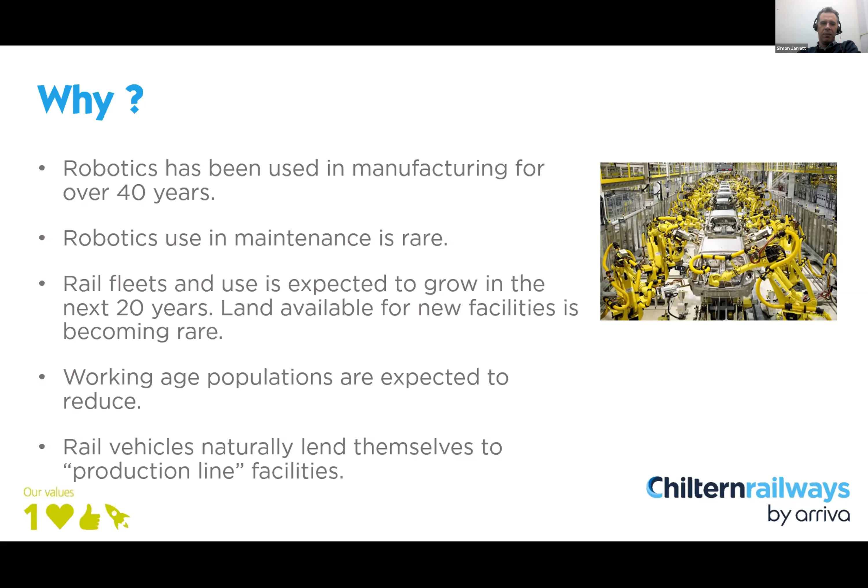But actually rail vehicles, when you look at them, lend themselves to kind of production line type facilities. So you can see on my illustration from a car manufacturing facility, that actually those cars are moving along on rails. So robots do actually hold for us, particularly in vehicle maintenance, quite attractive possibilities, and we're maybe actually quite well suited to it as an industry.

So where are their applications? There's stuff that is dull, stuff that gets us dirty, stuff that's quite difficult to do and maybe dangerous. For example, work on high voltage equipment, working in fairly hazardous chemicals, and stuff that we do very frequently.

If we do stuff frequently and we can get a robot to do it, that's probably got the best business case. So, for example, I work for Chiltern Railways. We fuel our trains every 2 to 3 days. It's a sort of task that would lend itself to being used to a robot doing.

Cleaning, we clean our trains every night, inside and outside. We top up fluids, we replace brake blocks and brake pads every night. And then on the electric trains, we replace shoe gear and pantographs.

I don't envy people who have to get up on pantographs to replace the carbons. Whilst we create and set up, we spend a lot of time setting up safe systems of work. There's surely a place or a position for robots to do that better for us.

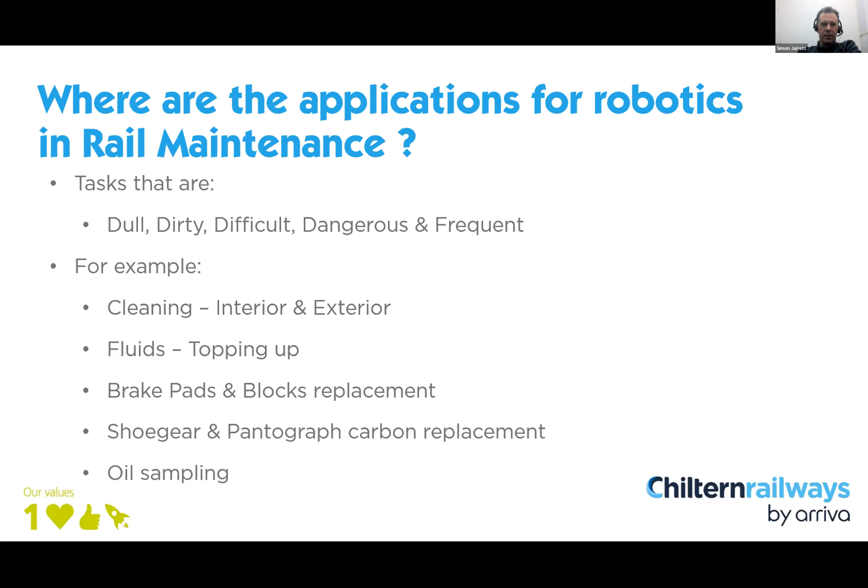So over the past few years, there have been a number of academic studies and work sponsored in the first place by RSSB, and there was some work by the University of Birmingham, Brunel University, who did a lot of work with me on application of robots to fluids, and Cranfield initially did quite a bit of work on how to clean train fronts. Some of that has been taken forward and is being developed into industrial products, particularly with a company called GBR Rail. But we are, as an industry, struggling to create the business environment that takes us from academic studies into real life applications of robots in the workplace and on our railway.

But tonight, we're going to hear from Cranfield. Professor Andrew Starr is going to talk to us about the work he's been doing with Network Rail on the approach to using robots on infrastructure maintenance.

And then Professor Gareth Tucker is going to talk to us about the work that Huddersfield are doing in their robotics laboratory on rail vehicle maintenance. There is a third research group in the country at Strathclyde University in Glasgow, who are also doing quite a bit of work on robotics in rolling stock. So we as an industry have gathered a bit of a research base in this, and we now need to try and develop the ideas and take them forward to actual railway trials.

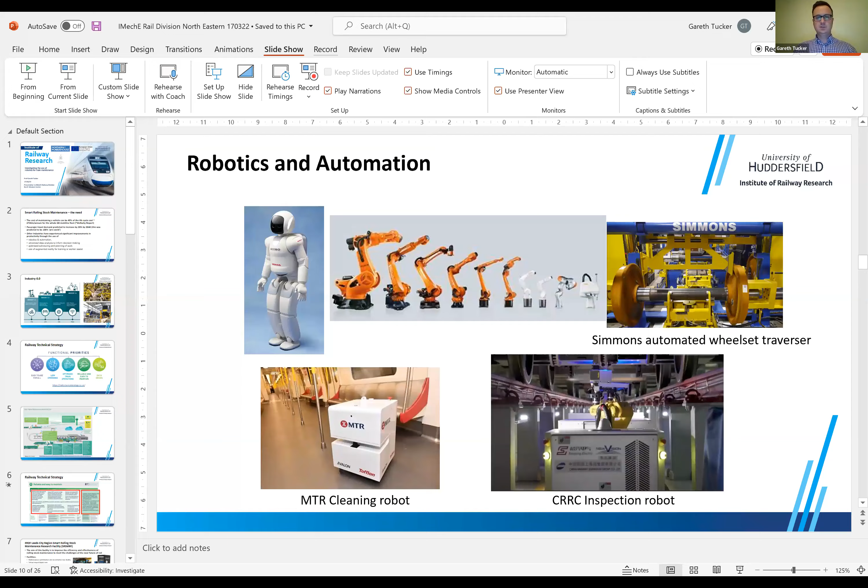So I'm Gareth Tucker, I work at the Institute of Railway Research in the University of Huddersfield. I'm going to tell you a bit about our work on the use of robotics for train maintenance. This is part of its long title, Smart Rolling Stock Maintenance Research Facility, which is an ERDF funded project.

So this is just a bit of background. We spend a lot of money in this country maintaining trains every year. The cost of maintaining the whole GB passenger fleet is nearly £730 million a year. So anything we can do to save a small percentage of that is going to add up to be big numbers.

It costs more to maintain a train through its life than it does to buy it in the first place. The whole life cycle cost obviously varies by fleet type, but on average 40% of the life cycle cost of a train is on maintaining it during its life. And it's a long asset life.

We think, as Simon alluded to, that the passenger fleet is going to keep growing. Obviously COVID made a big impact on passenger travel. There's still predictions that things are going to rise, maybe more slowly than they would have before COVID, with predictions saying 20% over the next 20 years. Obviously, if petrol and diesel keep going up like they are, then it is going to drive more people back to public transport, and it might go back to our previous imagination of what the growth might be.

In Simon's introduction, he also alluded to other industries using a lot of what we call smart technologies, which includes robotics and other things, data analysis to inform decision making, optimize scheduling and planning, and augmented reality. I'll mention them a little bit, as well as the robotics.

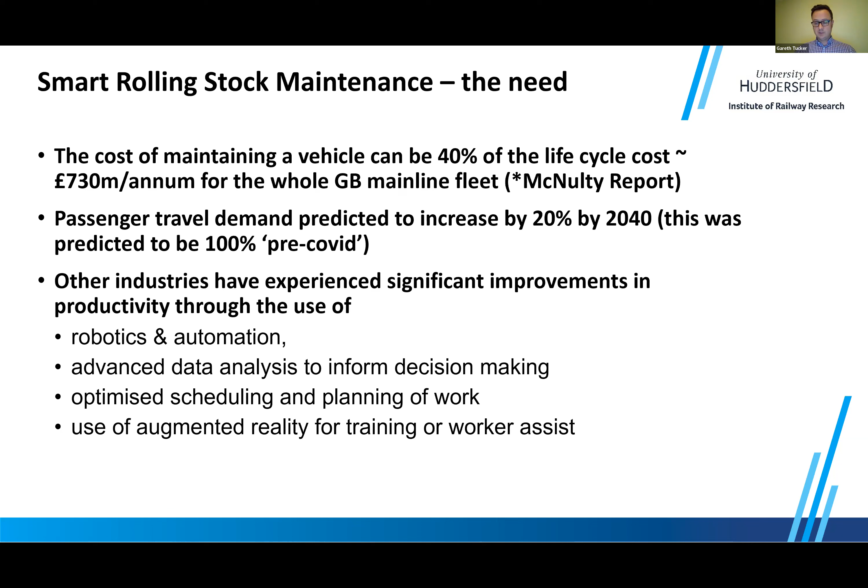A lot of you might be familiar with this concept of Industry 4.0, which is getting a bit of a buzzword recently. It's mainly focusing on manufacturing, but the idea is we're trying to take those concepts and apply them into a rail maintenance environment.

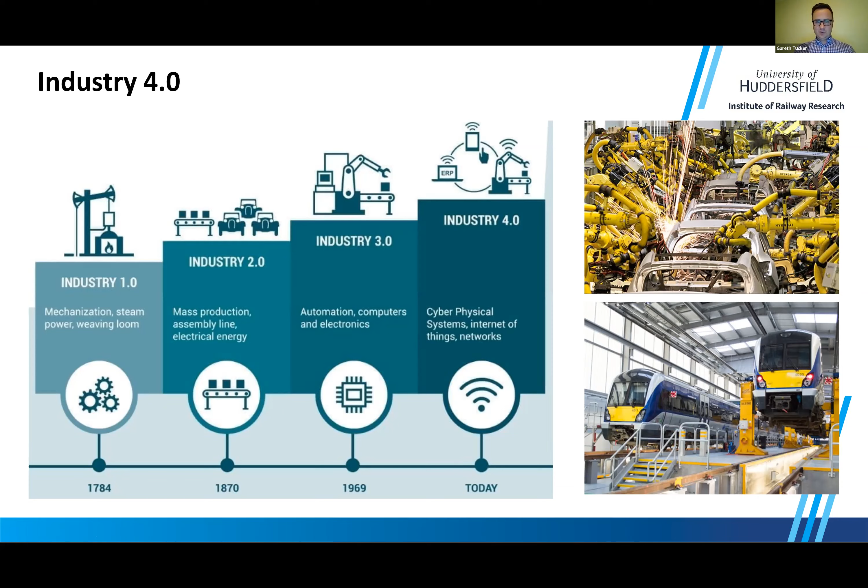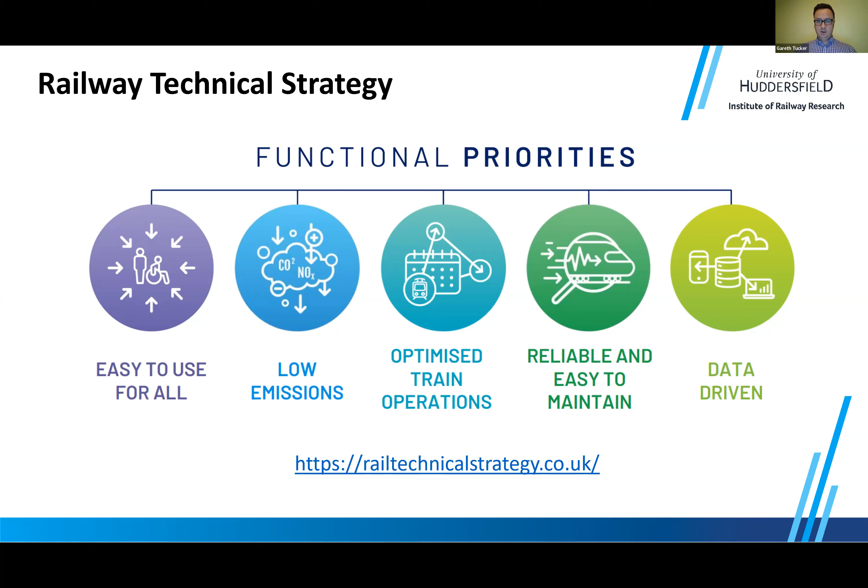And if we really do want to do that, obviously we've got to spend a lot of research and development time in order to do the implementation. Obviously in the real world, if it doesn't happen in 3 years' time, it happens in 5 years, it happens in 10 years, that's great too. But this is just showing there is some industry level aspiration to do something with robotics, either for trains or track or whatever we think.

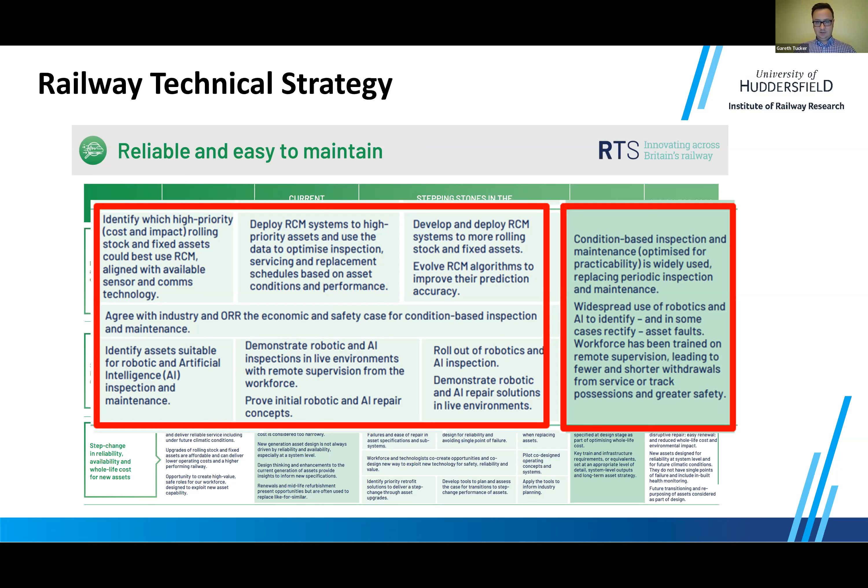So they'll be connected back to some sort of center, a data center that's going to do a lot of analysis, know all the movements of all the trains, know how far each train has gone every day, where every train is across the network, plan maintenance in the most efficient, optimal way.

And inside the depot, you'll have robots doing some of the work, not all the work. You'll have a digitally enabled workforce, so every staff member will, on a mobile phone, have a little app that's telling them the work they're going to do that day. That can link in with what the robot's doing. They can put in their results of their own manual or visual inspections. Also, an idea - maybe some stuff can happen during traffic hours when the train's in service, potentially.

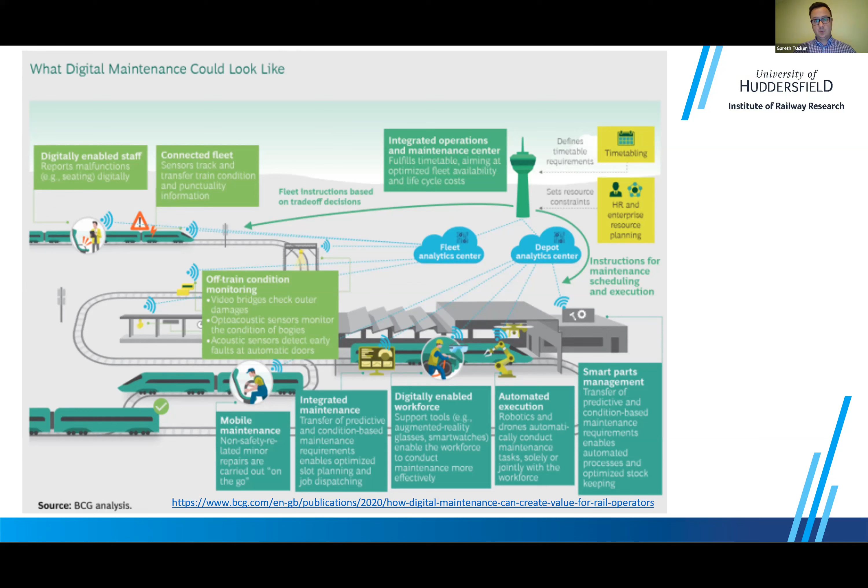So it's not just about robotics. I'm talking about the robotics element today. We've also got what we're calling the virtual depot, which is not a 3D model of a depot, it's a workflow model which we use for work optimization and planning, and RCM data processing and development, which we're using for the main element, that is trying to make better use of existing data that's already collected from trains to actually directly inform the maintenance.

And the augmented reality, which we think is a way of helping to either train staff or use as an aid during repetitive tasks so people don't forget things. And as an aspiration, at some point, maybe we're going to try and integrate that as a way of controlling the robots and calling programs on the robots. That's down the line. So this is a research project, we're just starting out, we're trying to see what's possible.

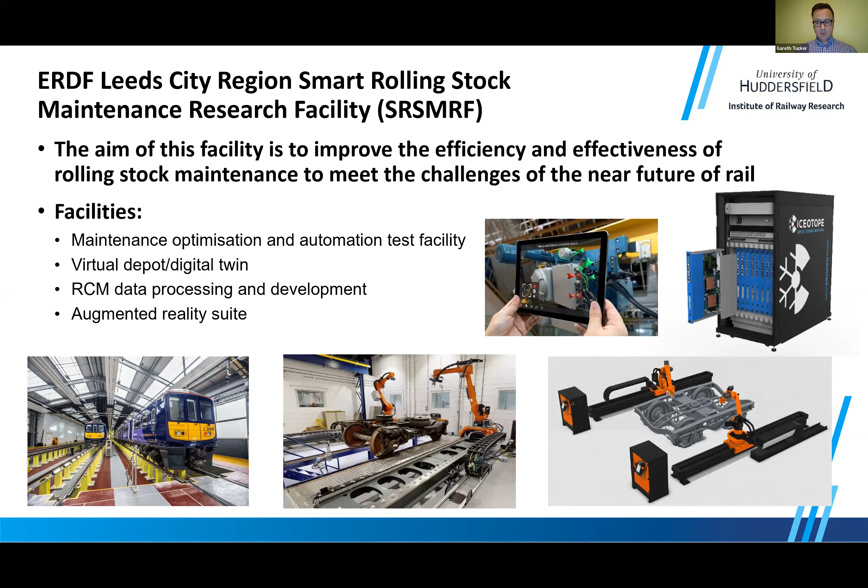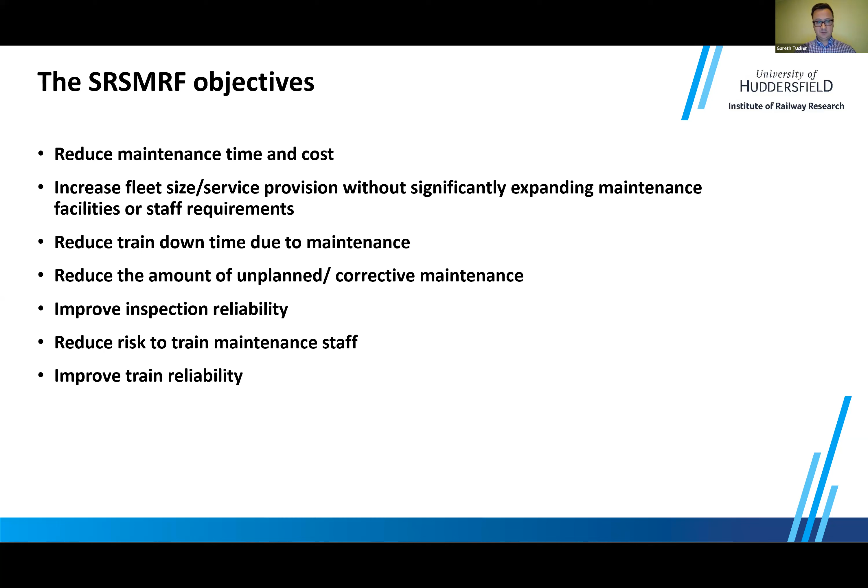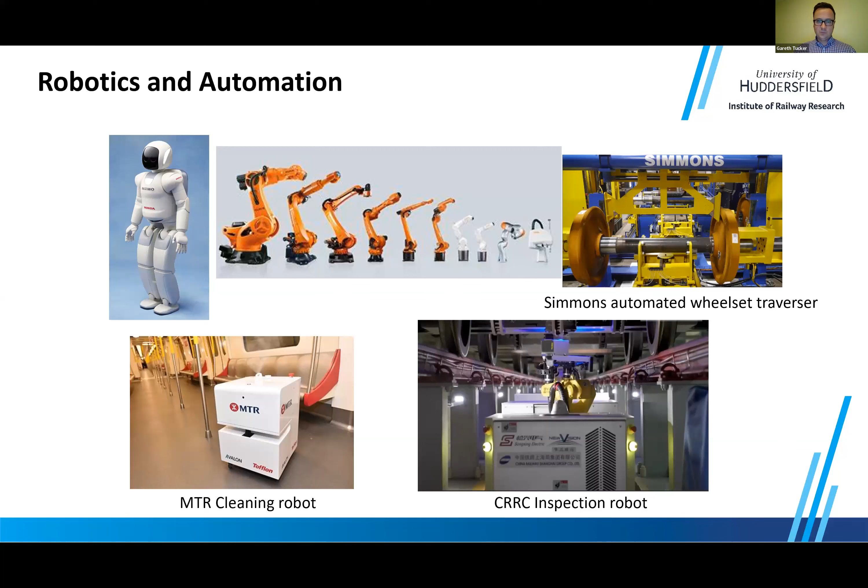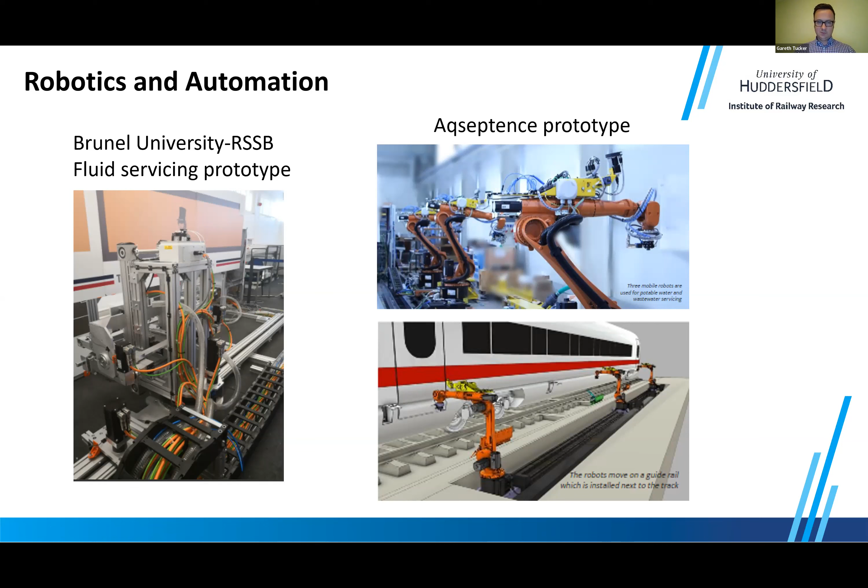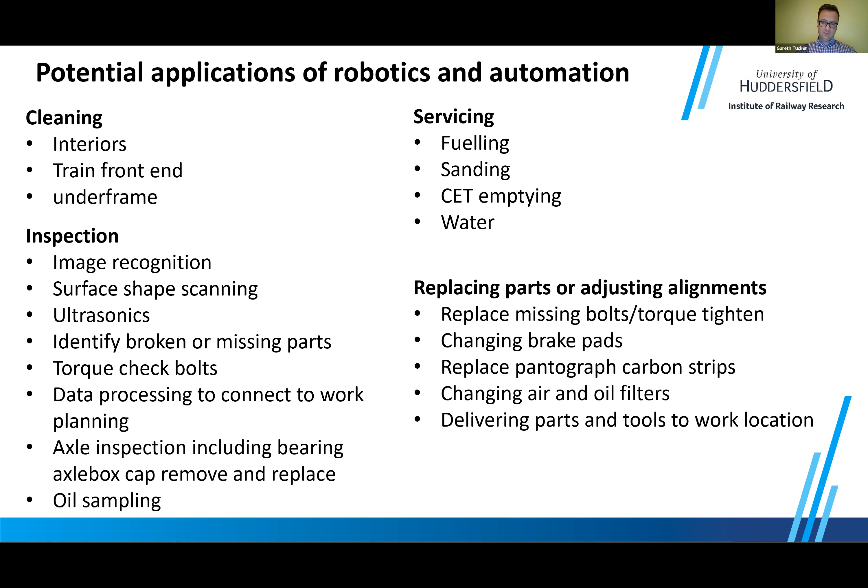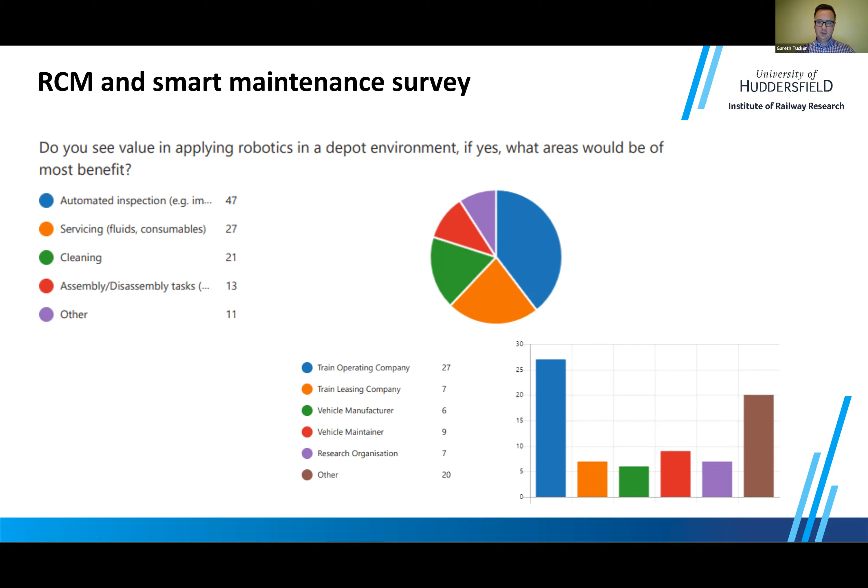Obviously when we go away and prove what's possible, we'll see if that still remains the same. So it's not straightforward trying to put robotics into a train depot.

These are the sorts of challenges I think we need to start addressing. Obviously in a manufacturing production line, everything is brand new, everything is moving through, it's exactly the same place every time. Each robot is doing a specific task, and everything is exactly where it should be every time it gets to its station. In a train depot, you've got a train coming in.

It's got a target point of where it's going to stop, but there's some tolerance within that, and any robotic system needs to be able to adjust for the exact stopping position of the train. Any components that have worn out, obviously the height of a train changes over time as the wheels wear, and the robots need to be able to adjust for that.

Robots also probably going to have to do multiple tasks rather than just one single repetitive task. There's also challenges around how we introduce industrial robots, since they need to be segregated from people. We need to work out how we might do that. And the business case obviously is a big challenge.

We need to be able to demonstrate there is a solid business case if people are going to go away and spend money up front on a lot of robotics equipment.

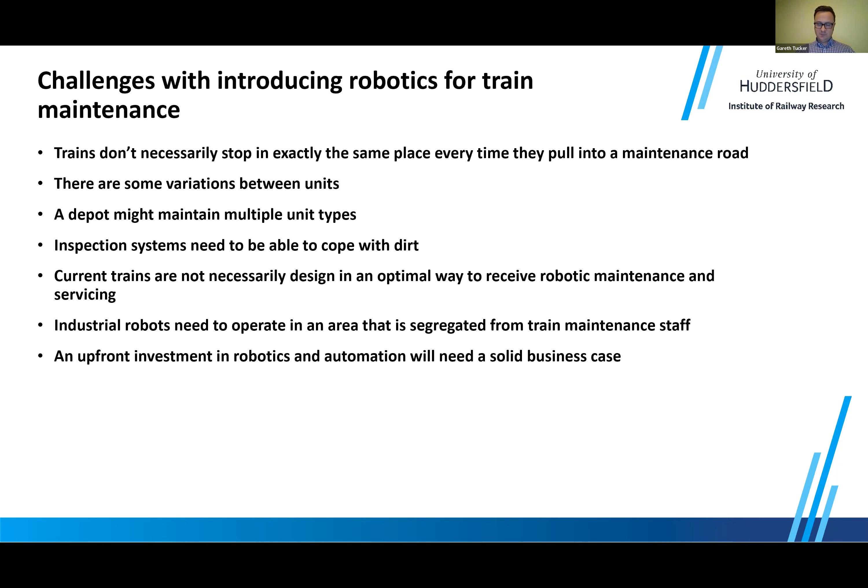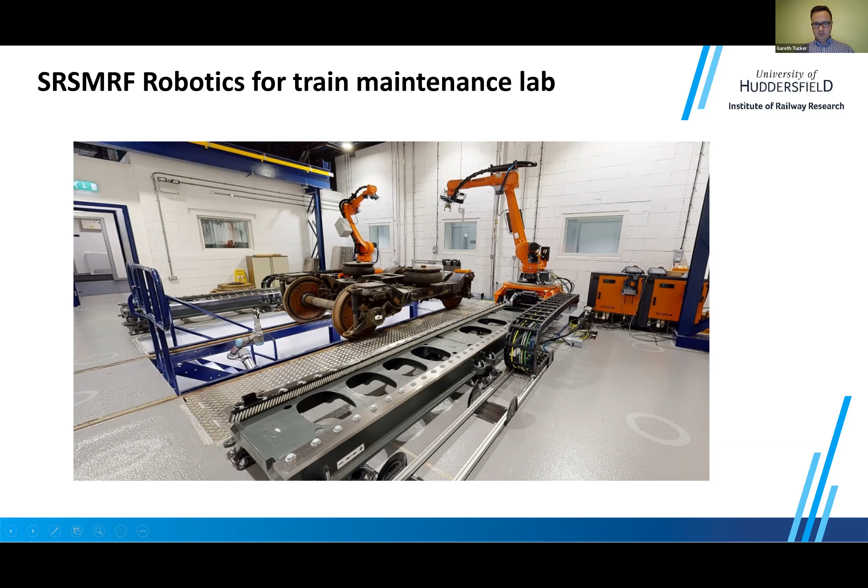Just another view of the same lab, showing in the pit with that UR robot I mentioned on its own little track.

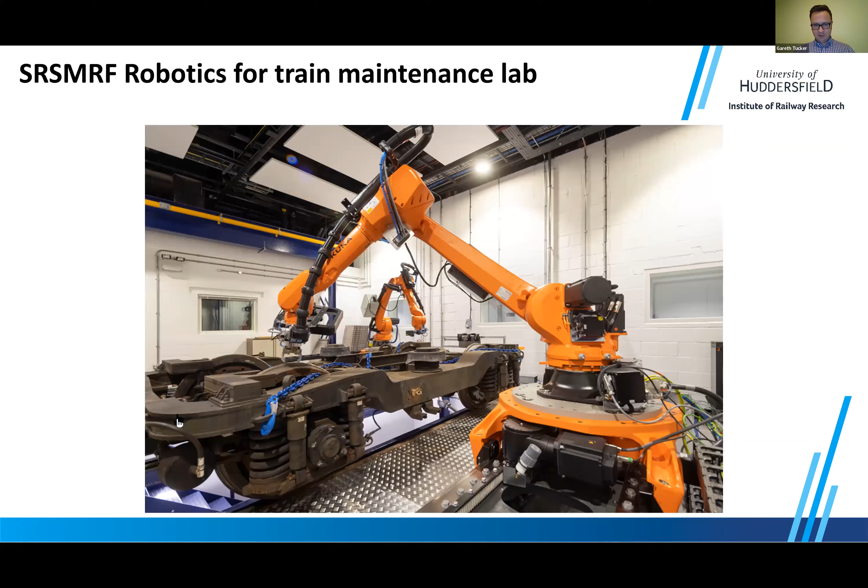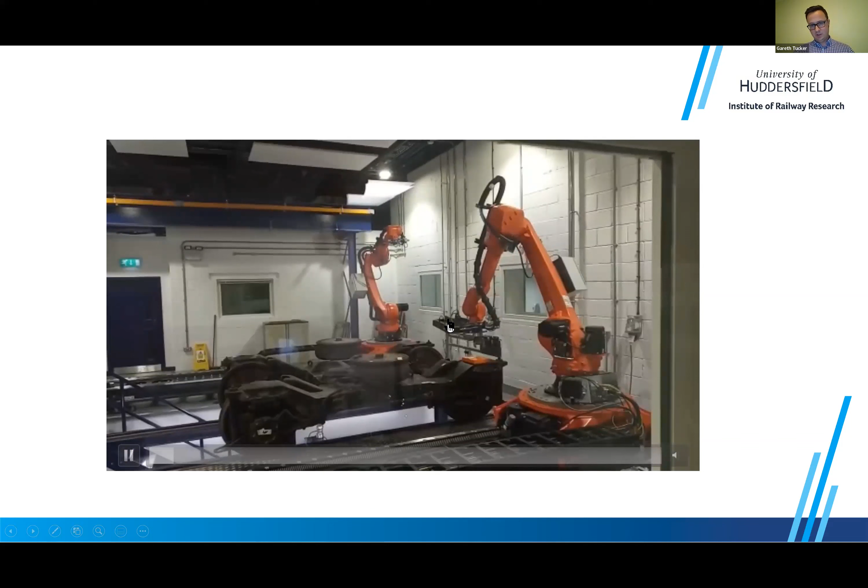This is a very short video done for commissioning, just showing the robots moving around. That one's got our vision system on it. It used the vision system to find a block, which it's now going to pick up, then takes it over. That movement shows you how quickly an industrial robot can move.

It's going to pass it to the other robot in the pit. That robot now is just going to move along the pit and raise the block up. Obviously this is just showing what's possible and showing that the robots can all connect to each other.

We actually need to start using them to do some realistic maintenance tasks. At the back there, we've got our tool changer.

So end effectors for industrial robots are expensive, so if you can share them between multiple robots, you can save a lot of money, and that's what we've done here. You can see the robot closest to us has put the end effector back on the tool changer.

The robot further away is now picking it up, and then it's going to use that gripper to pick up the block from the small UR robot in the pit.

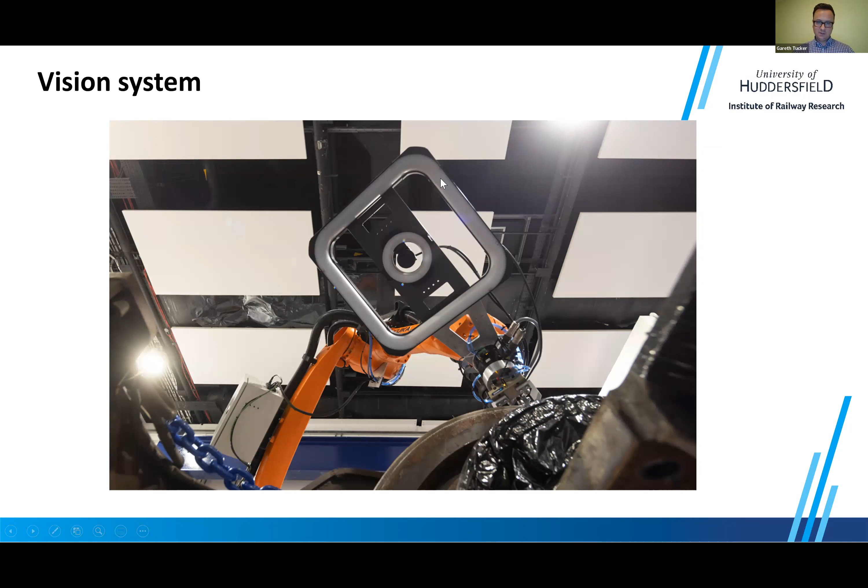So I'll just briefly explain a few other parts of the facility. That's our sensing vision system, which is mounted on one of the robots.

This is just going to show an example of the system doing a particular inspection. Here, the robot is moving the camera to inspect the bolts on the axle end cap.

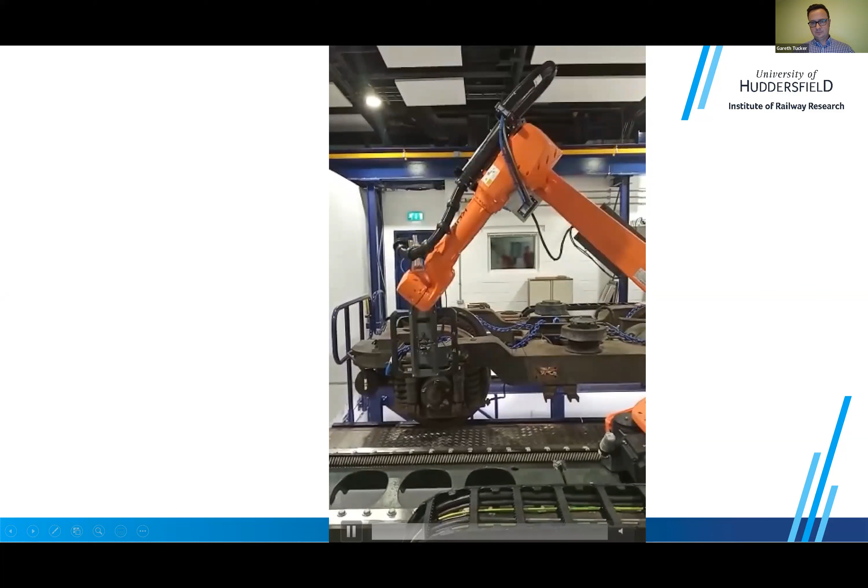So it's found the end caps, taken a photo. I'll just click through this a bit so I don't use up too much time. It's moving around in a slow, reduced speed mode because there's someone in the cell taking the video. Now it's moving the camera, and it's going to take a photo of that end cap on the axle.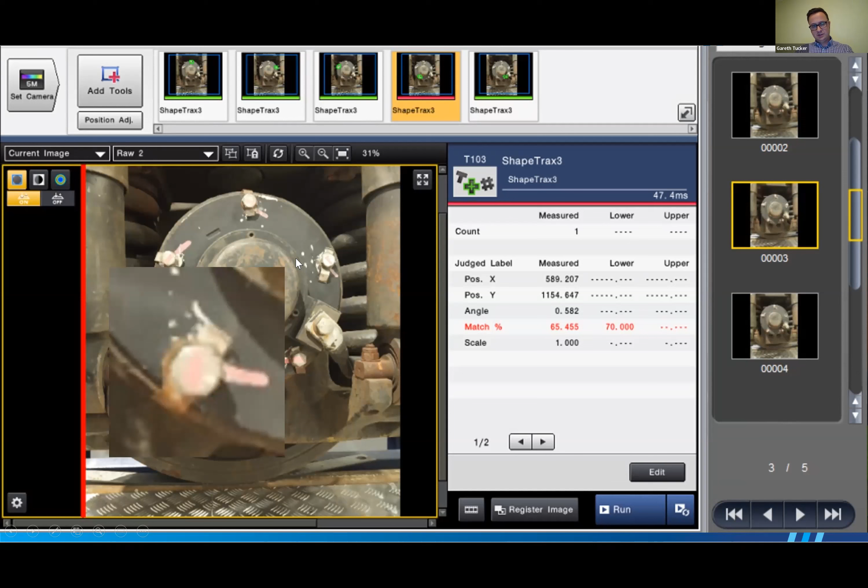So this is a nice automated way of inspecting those bolts.

This is a laser line scanner we've got on the other robot. This is just going to show a quick video, scanning the top of a wheel profile. Wheel profile is normally measured with a mini prof, in a position tangential to the surface. Again, if you don't know exactly where your wheel is parked relative to your robot, you need to scan along the top to find the highest point, which is where the wheel profile will be taken.

That's just showing it's a blue scanner, and that's the wheel profile we could measure. I've shown it taken from the top of the wheel in this example, where in a real depot there'd be the car body in the way, but we'd find a point where we could get in to do the measurement.

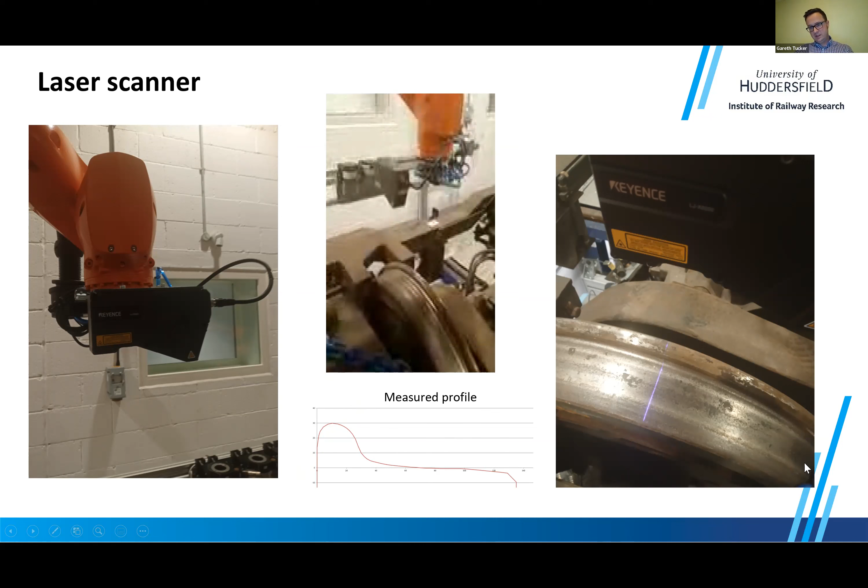So that's a very quick whistle-stop tour through our new lab and the things we want to try out. We're at the start of the journey. We've got ideas of the things we want to try, and some industrial partners. We're quite happy to talk to anyone else who wants to get involved, and you can get in touch with me to do that. So in conclusion, we think there is a high level of interest in this area.

But at the moment, we don't know exactly what is the best way to apply robotics into train depots. There has been some initial work done, but we think there needs to be a lot more work to demonstrate what is possible and investigate exactly how to implement this sort of stuff in the real world.

So what we're doing now, obviously we've just got that lab and we need to learn how to use it, what we can do. We're trying to identify some specific procedures that we want to try. I showed the laser scanner taking a 2D line profile. The next step is to make a 3D surface shape, because we know the coordinates of the robot as we move it around the cell. We can therefore turn our 2D images or measured shapes into a 3D shape, which will help us with different types of inspection.

We've done that initial study of the vision system, which I showed with the bolt ends, and we want to carry on developing that. We're also already in procurement for a third end effector for industrial robots, which is a nut runner - I call it an electrical torque wrench, but robot people call them nut runners. So unbolting and bolting things on is one major thing we want to start doing.

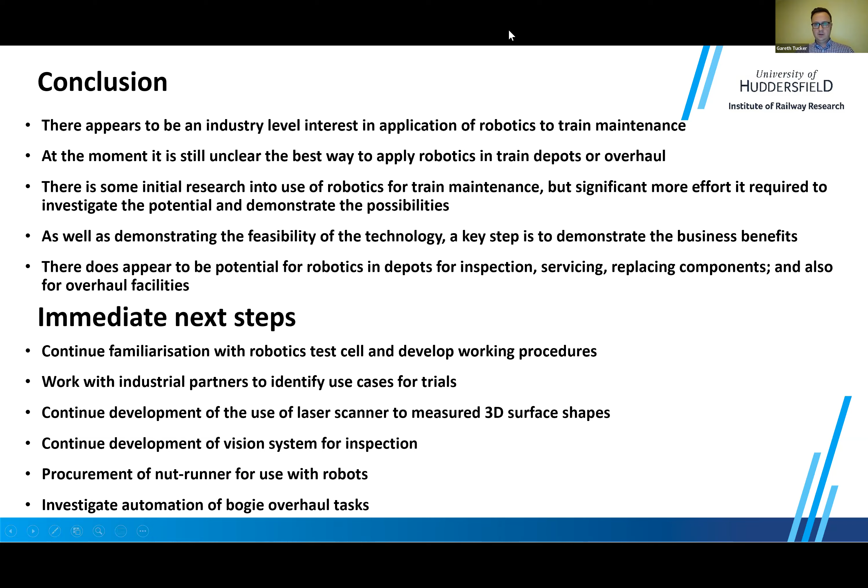Thank you, everyone. Simon, I don't know if we're doing questions or we do that at the end. I think we'll do some questions at the end if we can, Gareth. That might be better. Right.

Thank you, Gareth. That was useful and an interesting summary of what you're doing at Huddersfield. Good to see the laboratory and what's proposed. So our next speaker is Professor Andrew Starr. Andrew is a professor in robotics at Cranfield University, and he's been exploring their use in rail infrastructure maintenance. So Andrew, I'll hand over to you if that's okay.

Thanks very much, and good evening, everyone. Thanks to Gareth for a very interesting start to the evening. In this presentation I'm going to talk about the way in which robots are used on the infrastructure as opposed to vehicles. Firstly, some credits to my team. As Gareth has pointed out, you don't do this alone, you do it with quite a lot of people, and there's a lot of different skills involved. We've got people who are good at making practical stuff, programmers, people in instrumentation, navigation, simulation, and so on. So it is certainly a team-based activity.

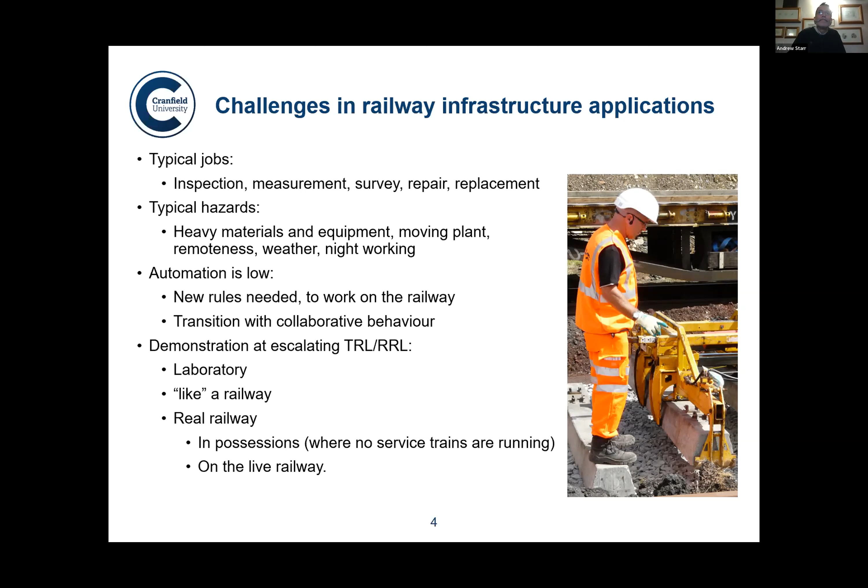So this vehicle, like other railway vehicles, has got flanged and coned wheels. So when it moves around on the railway, it has some freedom of movement from side to side, and because of the coning, it also means that it can move up and down a little bit. So the robot's not ready for that. The robot requires finer precision to be able to do what we like it to do. So that might sound perfectly obvious. It is once you know it. The benefit of hindsight is wonderful.

But what we were able to do with this vehicle is to demonstrate a number of key things. Firstly, a physical demonstrator. Some of you may have seen this at a show already. It's been to a few exhibitions before the pandemic. And it also enables us to demonstrate some systems integration. So the vehicle has a controller. In order to control a system, you have to decide what's in charge. Is it the vehicle or is it the robot? And you also need the drive systems to work in a way that is not the same as a locomotive, for example.

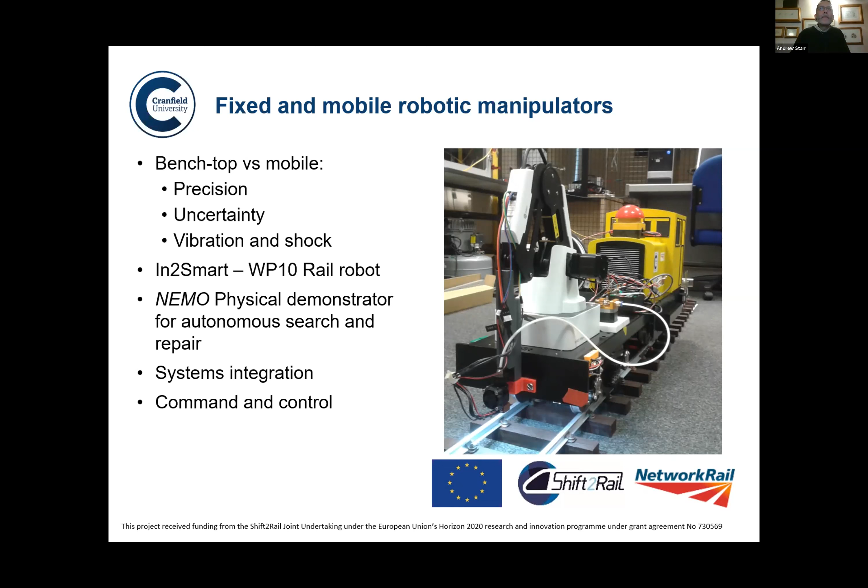So in In2Smart 2, within the Shift2Rail program, we moved up to a larger platform for inspection and repair. And again, the command and control is important here. Not only is there the yellow machine in this country, but we also work with Strukton and Chalmers University in Europe - one in Sweden, one in Netherlands - and we work with command and control processes that talk to them remotely for their part of the demonstration.

If you ever talk to any of the plant manufacturers and lease companies, they'll tell you that one of the biggest challenges they have is on and off tracking, and we can confirm that. It is fundamentally hard to get from ground level onto a vehicle on top of the rails, so that requires some manual intervention to get it up there. It climbs up on ramps, but it does it under manual control.

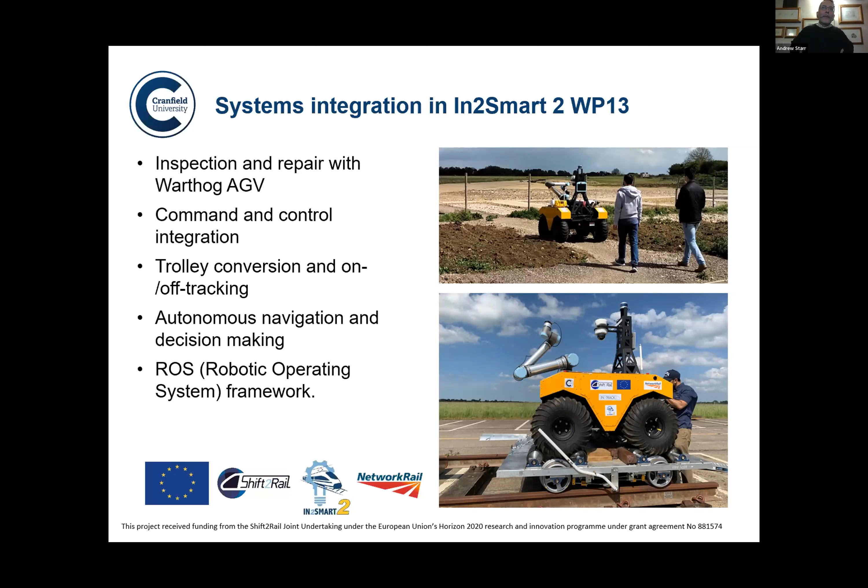So about the sensing - well, these vehicles can be loaded up with a lot of sensing. Firstly, for location and navigation, to know where it is, the vehicle is fitted with a global navigation satellite system, GPS, and we've also been using it with a real-time kinematics add-on. So GPS generally is good for about 8 meters. With RTK, it works to about 20 millimeters, which is fantastic, as long as you're within range of its base station. And this is a fundamental issue for the railway, because you don't really want a base station every 200 meters or so - that would create a high cost and then a maintenance legacy to drive this.

So we're very interested in ways of simplifying location. GPS and the signaling system offer a degree of location for a vehicle on the railway, but there are places that you can't really get a very good registration of location, and those include tunnels. They include Faraday cages, like station roofs, and wherever there's a lot of metal work - it really disrupts the GPS because it needs line of sight to many satellites.

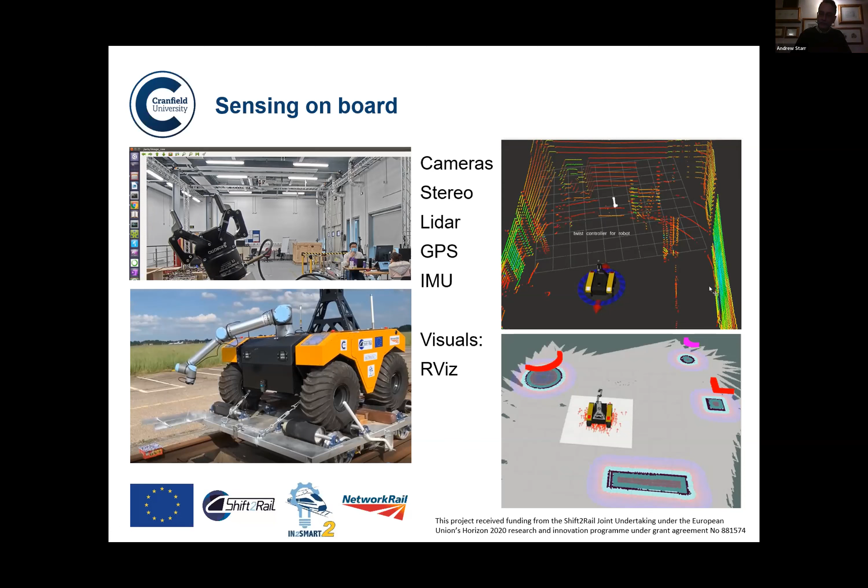So more about localization and navigation. This is a requirement because the purpose of getting out to the site is to be able to measure things and actuate things with a good degree of precision and repeatability. For example, there's no point going out to replace a clip on a track or look for a crack in a weld if we are looking at the wrong crack in the wrong weld.

The repeatability of that remains really important, because there are some locations on the railway that we only know by, for example, it's a signal, the length of the signal section. Vehicles and drivers don't really know their location that accurately, and the repeatability of the combination of systems based on simple things like encoders for rotations of wheels is subject to the starting point, the size of the wheel and its relative wear, and any slippage that's taken place. So this localization is quite a complex problem.

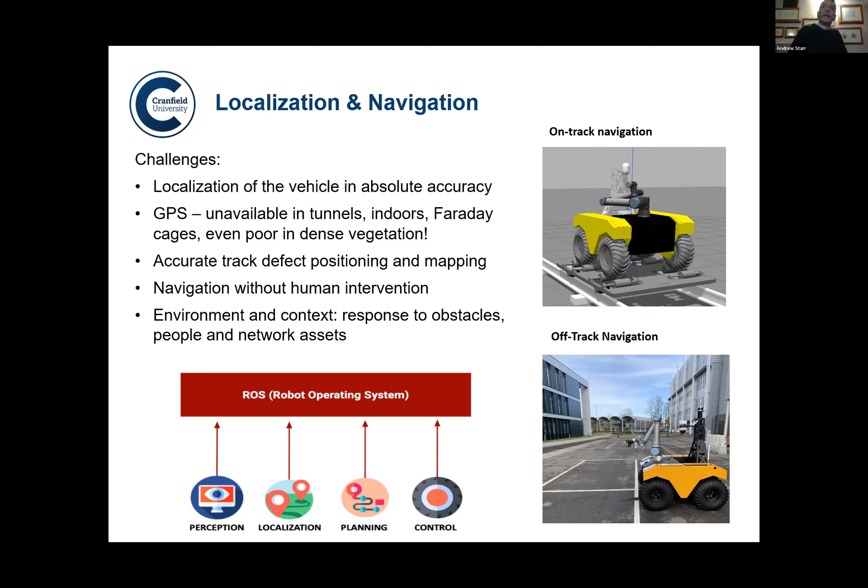Moving on to some of the actuation, we've been asked to demonstrate a number of different payloads on the vehicle. One of the initial observations is that the Universal Robot 10 robot arm is okay if the Warthog robot is on the ground, but it's actually too short to do much on the railway. So it can pick up plenty of good pictures, but...

On the left-hand side, this is a Sperry stick, with... well, I reserve judgment on whether that's a Sperry, somebody in the audience will correct me. It's an ultrasonic device which is hand operated for rolling along the track looking for cracks. We borrowed this one from British Steel, which is why I'm not sure if it's Sperry. It has a sensor in the little trolley at the bottom, and there's water for coupling it to the rail. Here what we've done is a proper Heath Robinson lash-up to get the Warthog's trolley to propel the stick along the railway.

What you can't quite see, but I'll show you in a moment, is that we've got a number of seeded faults built into this piece of rail here. On the left, on the concrete sleepers, we've got a continuous panel of track which happens to have a couple of welds in, but other than that, it's in good condition. The shorter piece on the right-hand side has been modified in our workshops with some standard Network Rail test indications. For the interest of expediency, you can see that we have fish plates here, but we don't have the bolt holes through, because it's quicker and they need adjusting fast when you're doing demonstrations like this. This vehicle has done a series of iterative tests to detect these seeded faults here.

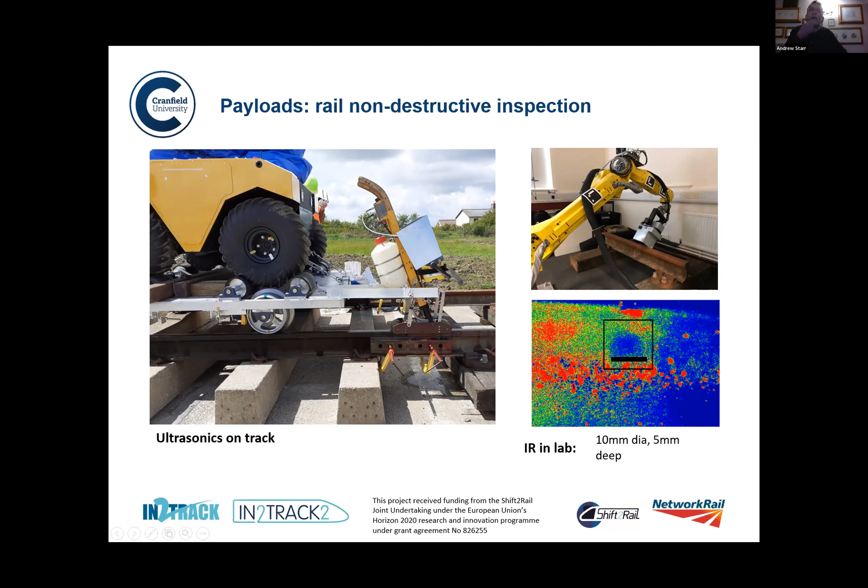So I mentioned a bit about the test environments. Middle of last year, we had this delivered on site. Cranfield's an unusual university - we are the only university in the UK to have its own airfield, and as a consequence we have space. If you're in the middle of town, you're always short of space, and that's a bit of a challenge. So you can see that we've got space here.

We'll probably build up another 2 or 3 panels, and possibly an S&C panel in this as well.

A close-up here of the faults which have been put in as seeded faults. There's some holes drilled right through, which are detected from the railhead. And then these faults and cuts here are drilled into the rail end at an angle to simulate tache ovales, a particular type of crack feature which is of great interest to automate.

Bottom right, you see where we're going testing in April, which is a heritage railway at the Northampton and Lamport Railway. We'll be doing longer distances here for the first time over S&C, and also over a variety of legacy track. You can see some of it is concrete sleepered, there's flat bottom, there's the older bullhead rail, there's wooden sleepers as well - so it gives us a number of different opportunities.

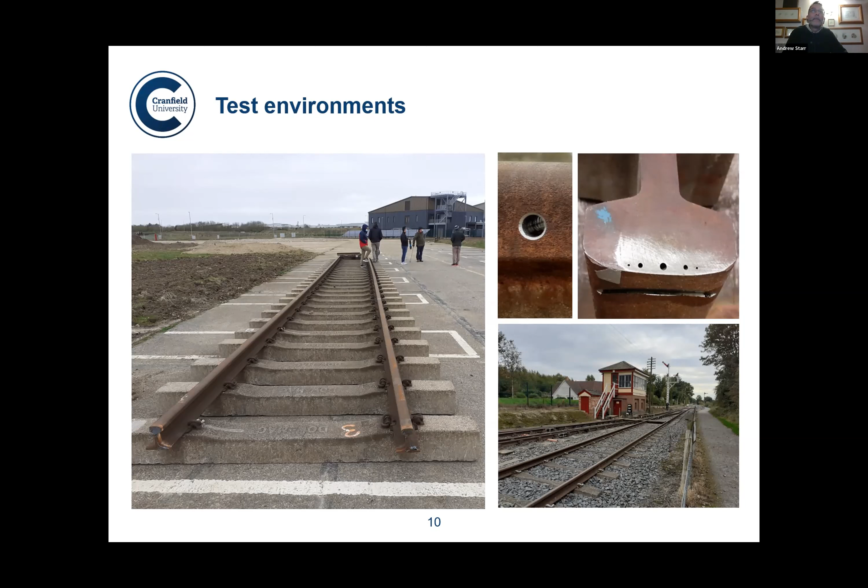And last but not least, this is the next generation for automation. This has just arrived in February, and this is going to be adapted for automation. At the moment, this is a manual electric push trolley - the manual controller plugs in either end, and the driver drives it always away from him or herself. It'll carry up to a ton, and versions of this are available with seats on, and can handle heavy equipment.

This is a proper approved product for the railway, and our job is to adapt this for command and control using ROS2, the latest version of the robot operating system. We will need a completely new control and sensing suite for this, designed for the next phase. In particular, we're interested in developing this with the UK supply chain, because the Warthog, as good as it is, is actually made by a Canadian manufacturer, and they've been much harder to work with than colleagues in the UK.

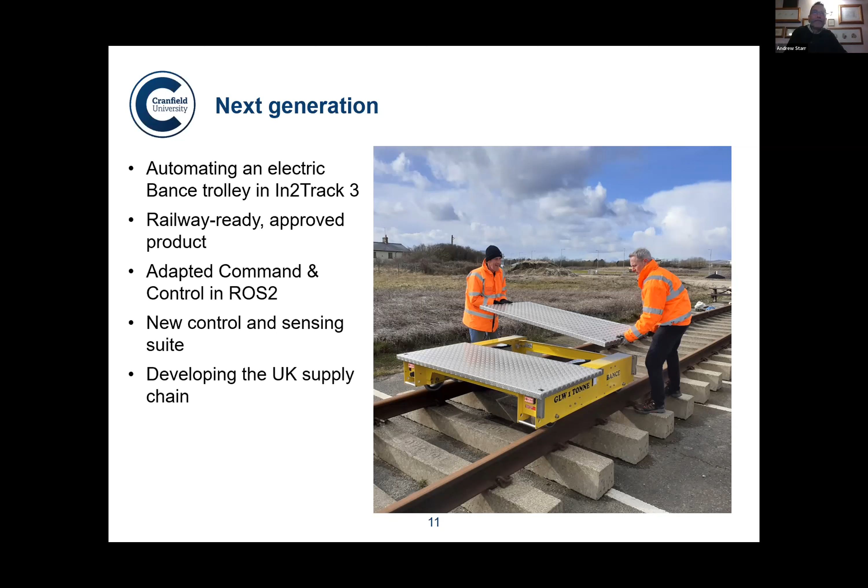So finally, a bit about the future. Please pay no attention to the shape of this vehicle - it could be any shape, but I wanted to try to identify where some of the big changes would be to remote operate or retrofit some of the vehicles that are already available for the network. And a lot of that is about sensing - for example, vision and other situational awareness sensing, drive-by-wire actuation.

So the retrofit package we're designing for the Bance trolley is critical to that - it's real-time processing and sensor fusion. All the rest of the darker blue boxes already exist in product development, and there's a lot of excitement in the supply chain about getting more automation into these areas. Remote control is one of the first things to do, radio remote, and then increasing amounts of driver assistance.

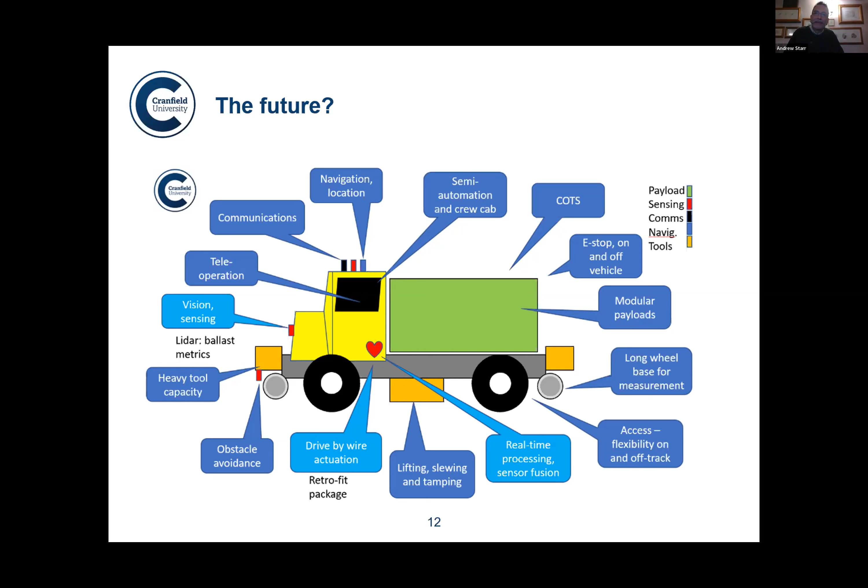So finally, in conclusion, the key driver is probably the idea of less people, less boots on the ballast. But the railway needs a continuing and expensive, rigorous maintenance programme. Lots of operators across Europe have told us their need for survey work, for close-up flexible inspection, so that they can plan their work ready for precision interventions, whether that's with people or machines.

We think that some of the key work in the future is going to be about regulations - specialist regulations for the railway, some about people doing collaboration, but also some about independent vehicles on the railway. There's a key piece of work to do about how you get an object onto the railway, because trains go from depot to station, pick people up, do jobs, take freight, go back to the depot again. Robots aren't going to do that - they might just appear on the railway, and currently that is frowned upon. Things which just appear on the railway are kind of a problem for the signaller.

And there's also more work to be done about actuation, because as I mentioned at the beginning, the heavyweight stuff is dealt with by the big yellow trains, but light to mid-weight tools that are perhaps on the limit of what human beings can operate up to what a medium weight road rail vehicle can operate - those are going to be very interesting for flexible interventions.

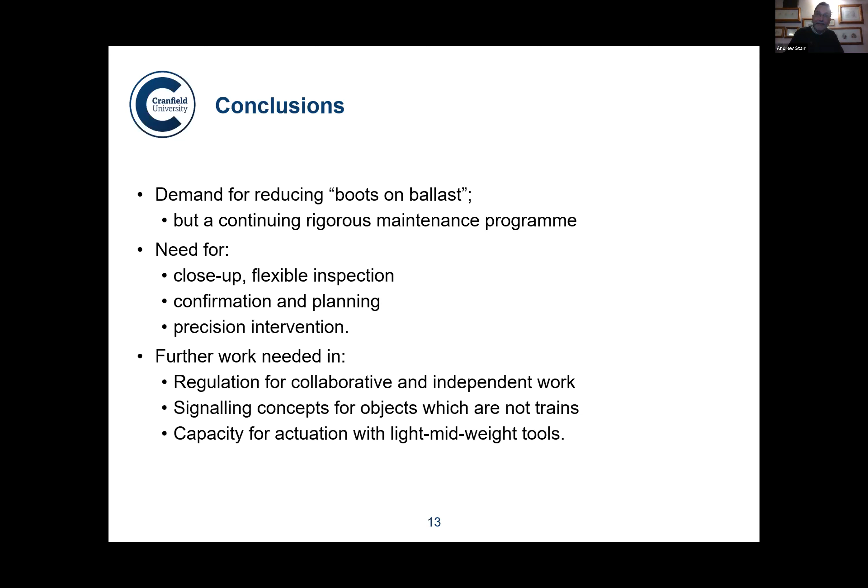Thank you, Professor Starr. That was very interesting and very heartening almost to hear the progress that's been made on the infrastructure. I feel that you're probably nearer getting stuff in use than perhaps we are in some of the maintenance aspects on the vehicles.